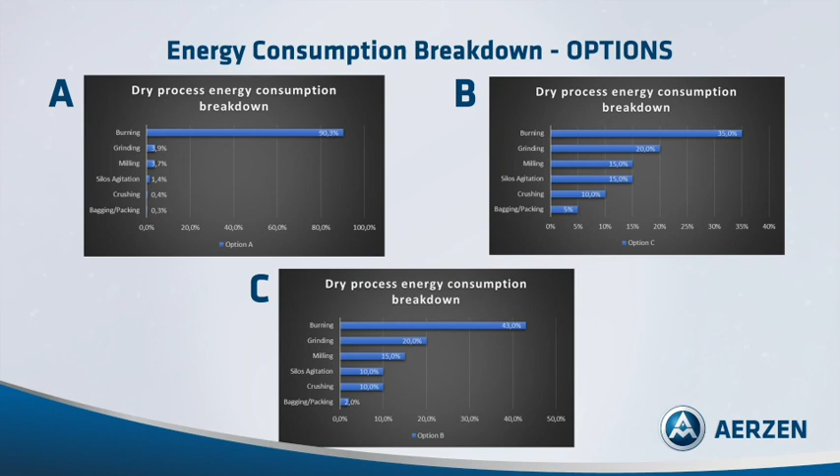Before we get going, let me ask you a question. Can you select the most accurate numbers to describe the energy consumption breakdown in the dry cement manufacturing process? Let's see the options. If you chose option A, you are correct. Burning is the most energy demanding process, basically because it needs to reach temperatures over 1400 degrees Celsius. During the calcination process, most of this energy is thermal energy, in consequence, the highest CO2 emission producer.

AERZEN is fully aware and committed to be part of this challenging target for the cement industry. We know that from those 2.3 billion tons of CO2 generated from the cement industry in 2020, more than 90% came from the calcination process. That is, of course, related to the energy consumption breakdown in the production process that considers both electrical and thermal consumption. This is why we will focus on that process optimization so we can learn the best practices doing what we best do, developing new business models and solutions for our customers.

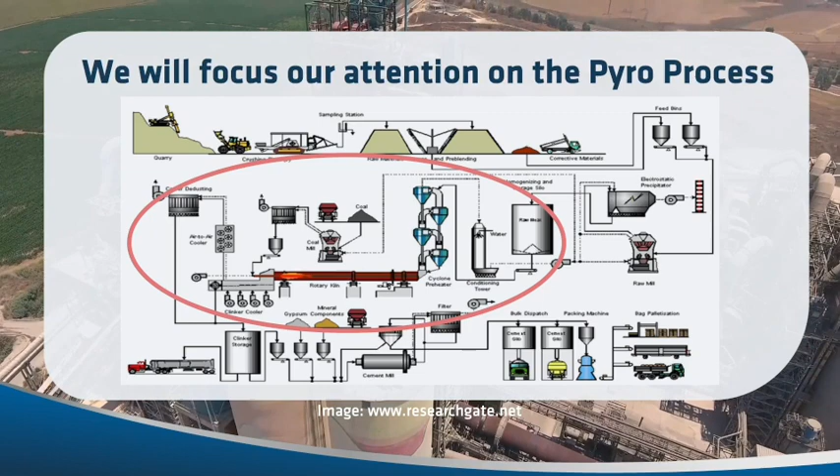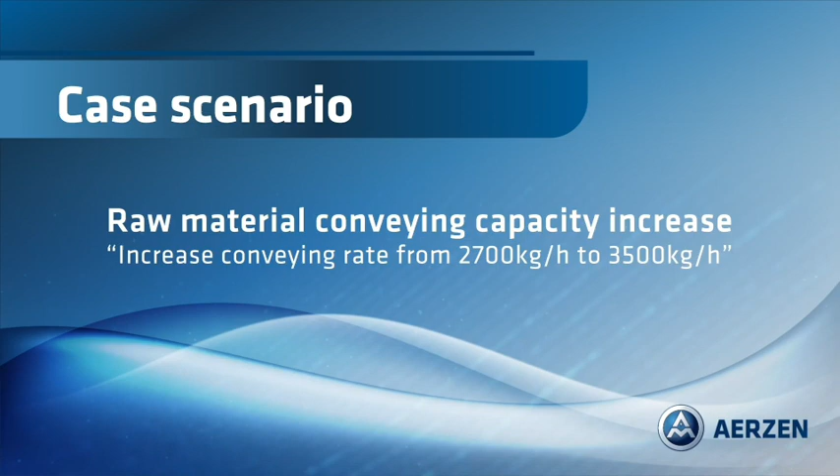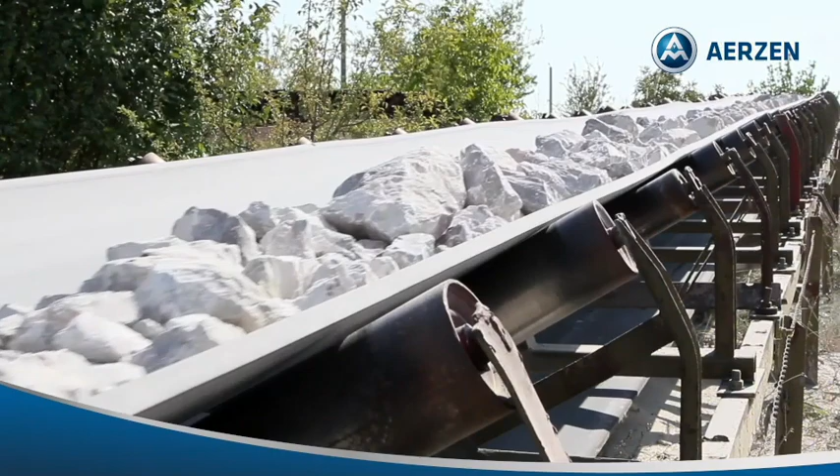Cement industry, as mainly all other industries, requires a raw mix to produce the final product, clinker, which is basically finished cement before it's ground in the final milling process. Raw materials quality and the proper chemical composition of those materials are key factors to guarantee a proper burning process, avoiding lower heat transfer due to bad quality batches.

Raw material is as important as everything else in the process and plays a critical role in the final product quality. Cement is manufactured through a closely controlled chemical combination of calcium, silicon, aluminum, iron, and other ingredients. Can you tell what is the composition range for a good quality mixture of Portland cement? Let's see the options.

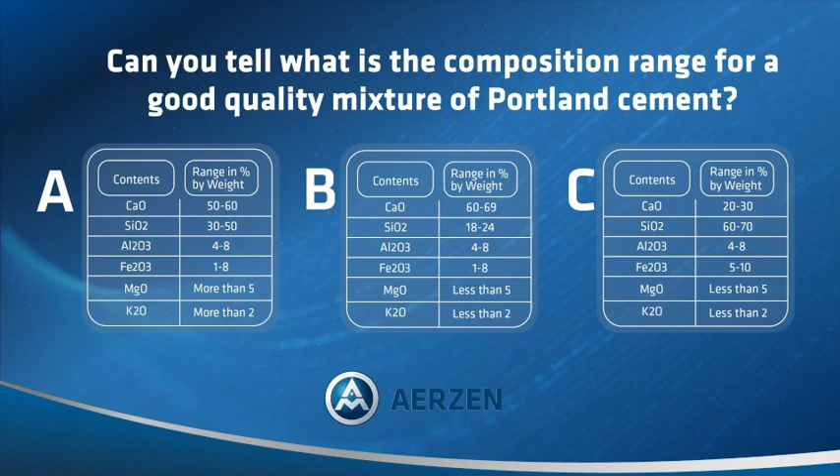If you selected option B, you are correct. Raw mix for cement production needs to have a majority composition of calcium oxide and silica, and a lower proportion of aluminum and iron components. The percentage by weight included in the original mix is tested in the laboratory and needs to fulfill the ASTM C150 standard classification, so it can be called Portland cement.

With any deviation in the composition range, it's a valid construction material, but cannot be called Portland cement, and in consequence cannot be used for high-strength concrete applications such as buildings, bridges, roads, and so on. If we take a closer look at the last two materials shown in the chart, we see that the amount of material is represented as a maximum possible quantity and not as a percentage per weight.

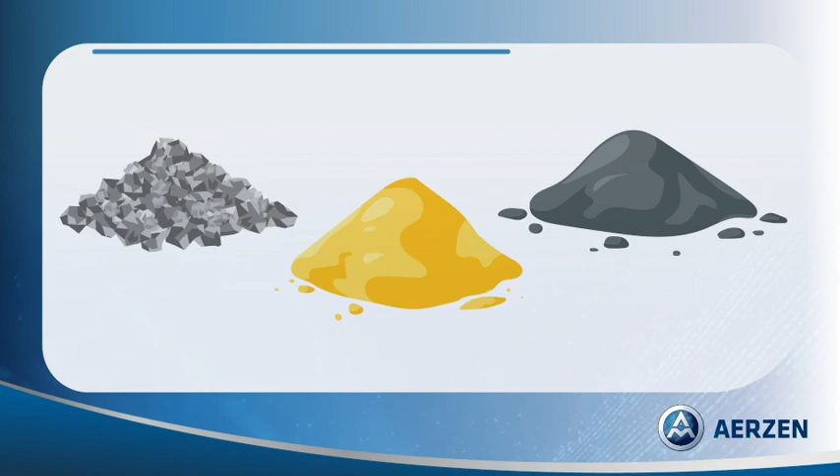The reason for that is basically because the more magnesium and potassium we have in our mix, the harder the oxidation process will be, and we will see incomplete chemical reactions and bad clinker quality. Avoiding these two elements may not be as easy as it seems, as they are attached to the original stone. Corrective materials need to be added and properly mixed to correct this problem from the beginning.

Clearly, they can't, which means they need to add corrective materials to guarantee the chemical composition before the raw mix enters the process. The materials used to correct the mix depend 100% on local availability and will change from plant to plant, even if they are located in the same country. As inland transportation costs are a higher price to pay, cement plants will look closely for the nearest material available.

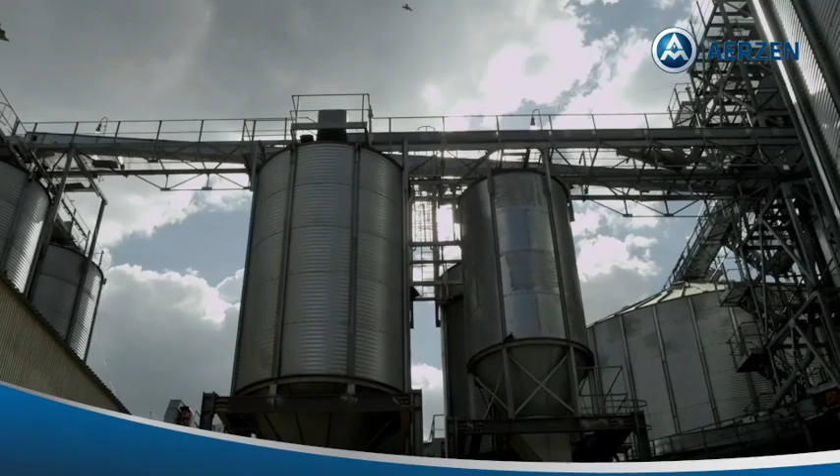In this specific case, they use kaolin and clayey materials to add the expected minerals into the mix and overall reduce the amount of magnesium and potassium per weight in the mix to avoid major problems in the milling and burning process. All these materials need to be properly mixed in the homogenizing silos, so the final composition is as smooth as possible and with the granular size needed to enter the preheater tower.

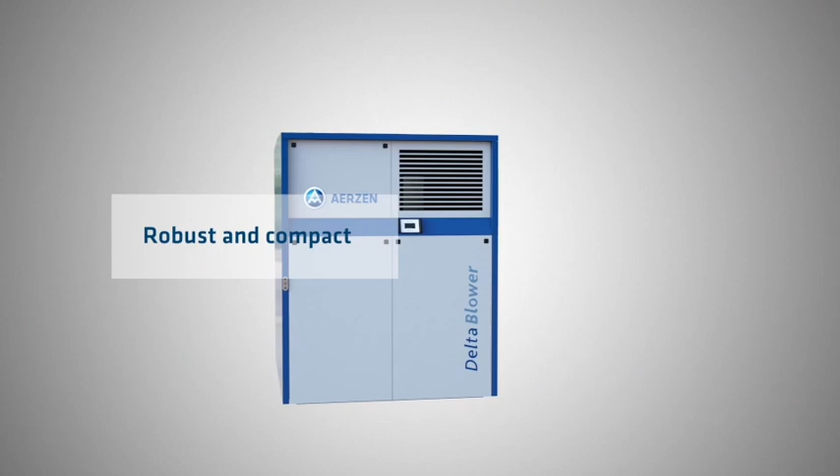Silo homogenizing and raw material pneumatic conveying to the preheater tower are two of the most important applications in a cement plant, where AERZEN equipment homogenizes and conveys millions of tons of raw material around the globe. From the beginning of their operations, this plant has used a set of 10 AERZEN GM25S units to homogenize the mixture in 3 silos with a capacity of 12,000 tons. At the time, they had a sliding vane compressor in operation to pneumatically deliver the raw material into the preheater tower. Operational conditions for those two processes are as follows.

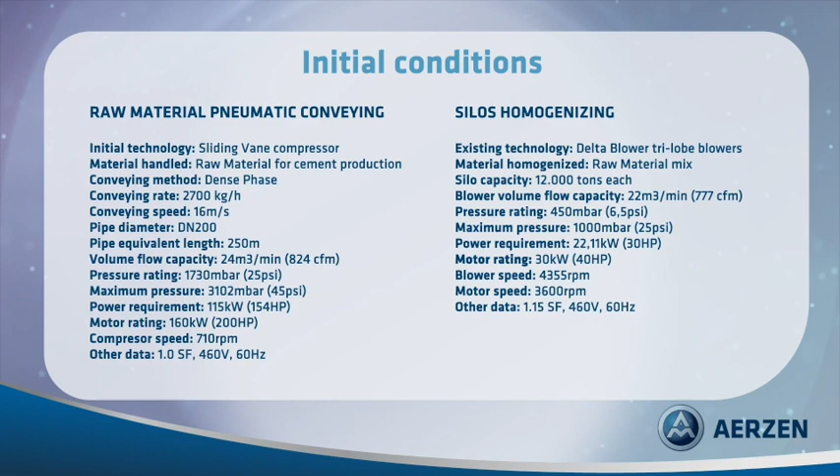Late in 2017, increased production demand required more raw material per hour for the process. As I mentioned, the existing machine was a rotary vane compressor that requires a fair amount of oil in its reservoir, a permanent water supply for cooling, and at least a yearly overhaul to guarantee the internal gap between the vanes and the cylinder to keep the same efficiency level. The machine was also operating near its capacity, and an upgrade wasn't that easy at the time.

The AERZEN team supported the pre-engineering process and helped with basic calculations for the new pneumatic conveying capacity that the system required. The real challenge for this project was to increase the conveying rate from 2,700 kilograms per hour to the maximum capacity, maintaining the same piping system for the homogenized raw material.

As mentioned before, for this type of material and density, the most common conveying method is dense phase, which basically means that the material travels at a slower speed, generally lower than 20 meters per second, on the bottom of the pipe from one point to another. The pipe diameter was an important restriction to the project. However, by increasing the volume flow by 50% and the pressure capacity by 15%, we were able to increase line conveying capacity from 2,700 kilograms per hour to 3,500 kilograms per hour.

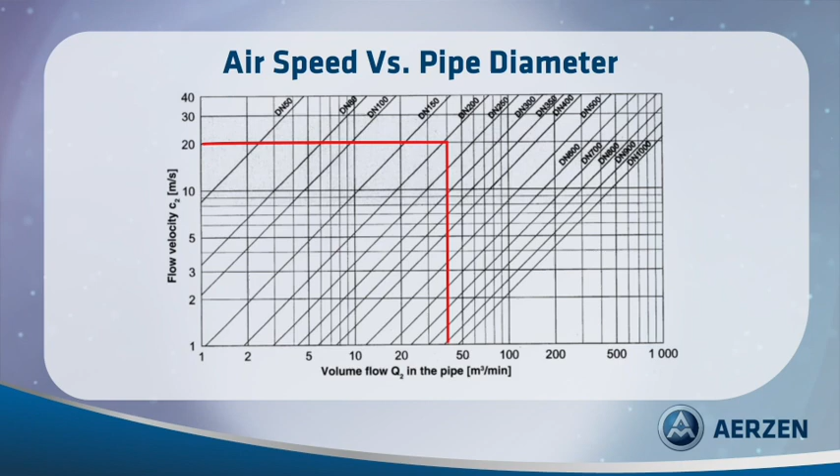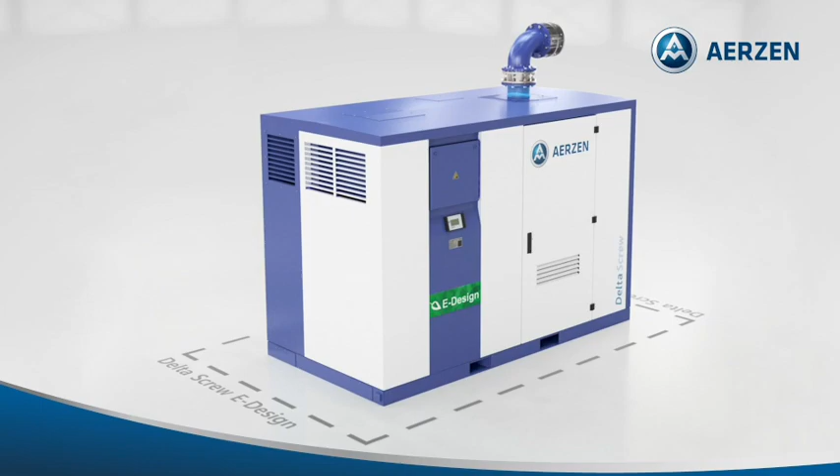Conveying speed also increased, as more material needed to be moved through the pipe with the same diameter. However, we managed to stay at the lower 19 meters per second to avoid pipe clogging. Let's review some of the major takeaways from this case scenario in which we replaced the sliding vane compressor technology with the AERZEN Delta screw compressor.

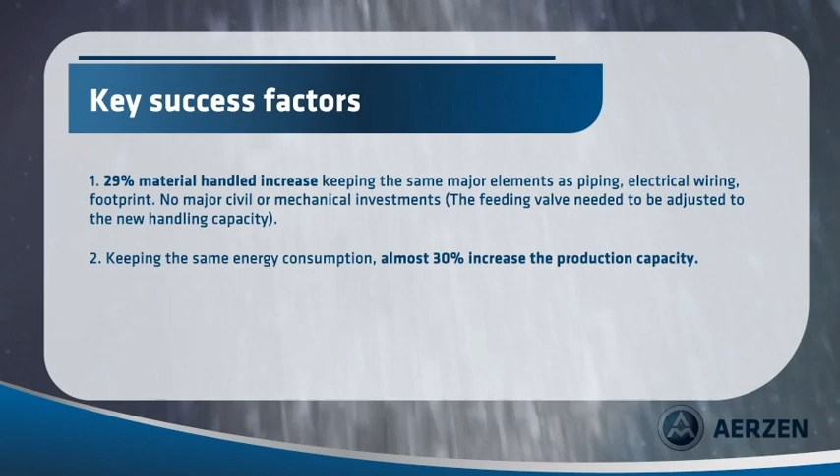First, a 29% increase in material handled, keeping the same major elements such as piping, electrical wiring, and footprint, and no major civil or mechanical investments. Second, keeping the same energy consumption while increasing production capacity by almost 30%. And third, avoiding costly maintenance of oil reservoirs, water supply for cooling, and complete repairs inherent to the sliding vane technology.

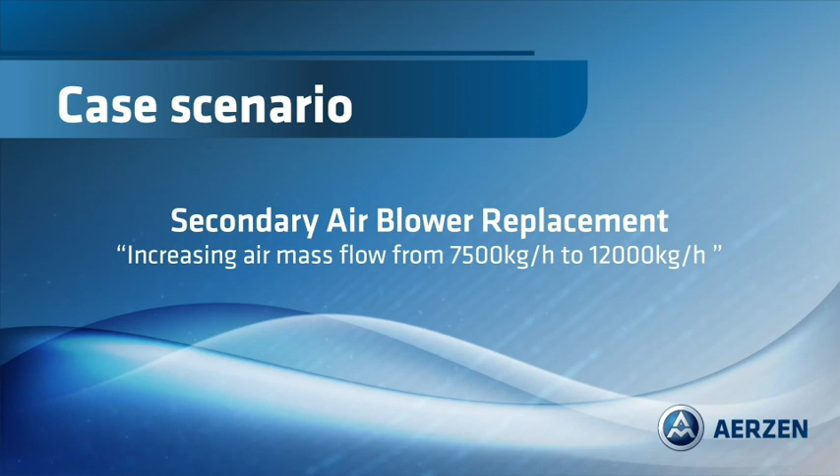Cement manufacturing is a highly energy and emission-intensive process because of the extreme heat required to produce it. Producing a ton of cement requires 4.7 million BTUs of energy and generates nearly a ton of CO2. Different types of fuels can be used to reach that needed temperature to produce clinker, all of them with its cons and pros for the process, as well as for the environment.

Thermal energy is the most important part of the burning process, as the material needs to reach a certain temperature to guarantee the proper chemical reaction of the raw material components. Can you guess how high the temperature needed to produce cement is? If you selected option C, you are correct.

At that temperature, belites and alites are completely formed into the clinker rock, having the appropriate microscopic shape that will guarantee that after the final grinding, where we will see the cement powder, water absorption will be even along the particle, which finally determines the quality and strength of concrete. Have you seen some cracks in the road? One possible cause is a lower cement quality.

Now that we know how important the temperature in the kiln is, let's see the possible materials that can help us reach that high temperature. Do you know what is the most used solid fuel in the cement industry? If you selected option D, you are right. Coal has been the most popular fuel in the cement industry for a long time.

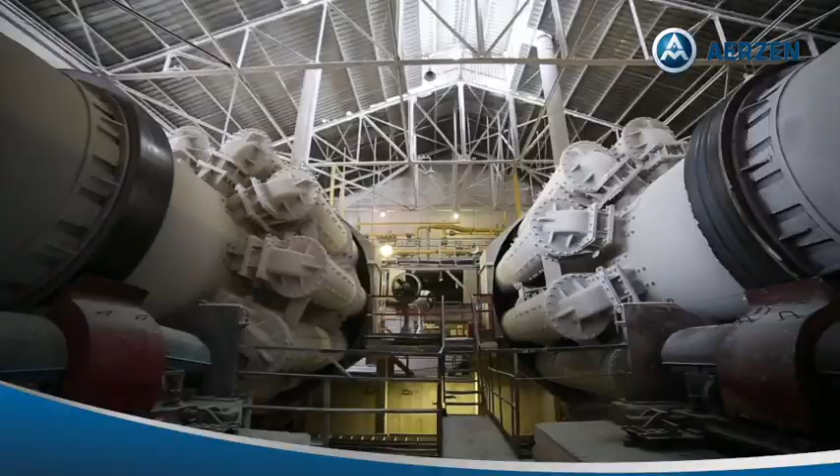A wide range of other fuels such as gas, oil, liquid waste materials, solid waste material, and petroleum coke have all been successfully used as a source of energy for firing cement kilns, either on their own or in various combinations. As we know, clinker is brought to its peak temperature mainly by radiant heat transfer, and a bright and hot flame is essential for this. High carbon fuels such as coal, which produces a luminous flame, are preferred for kiln firing.

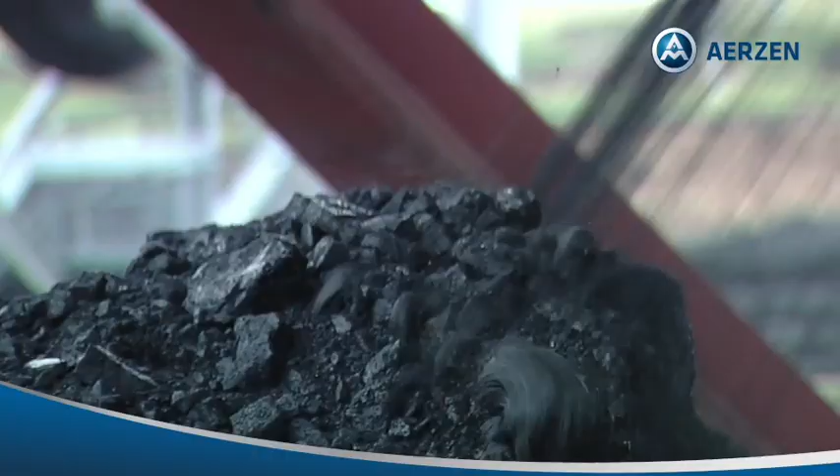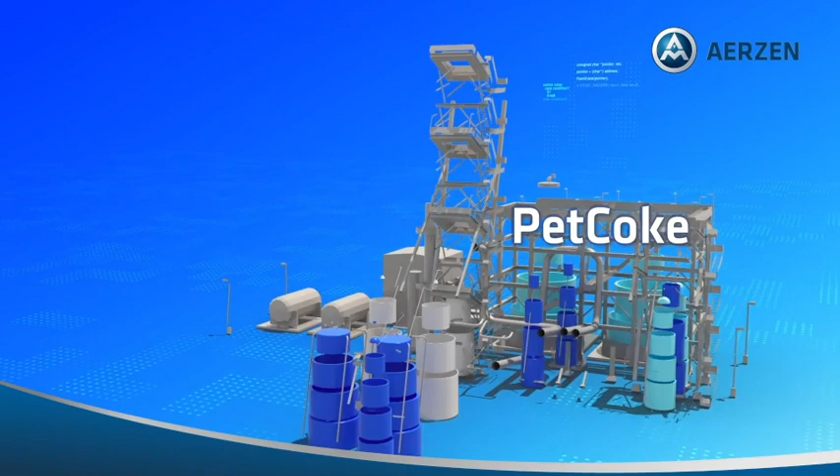Natural gas is in most places cheaper than coal. However, the availability can be compromised, and cement plants cannot afford to limit their accessibility to the fuel. Another material that has been widely used is petroleum coke or petcoke, an oil byproduct with similar heat transfer as coal, but with a considerably higher CO2 emission per ton burned.

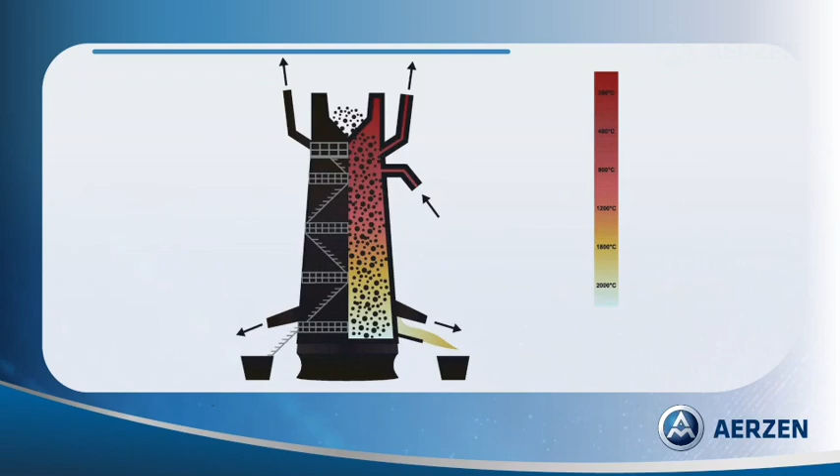In our customer's plant, they mainly use coal as a primary fuel source. However, coal prices have had considerable fluctuations over the past years, and availability of the material has become a challenge in countries where power plants fired by coal are a priority. In addition to this, the plant was going through an important expansion project to increase capacity from 3.2 million tons a year to 5.2 million tons.

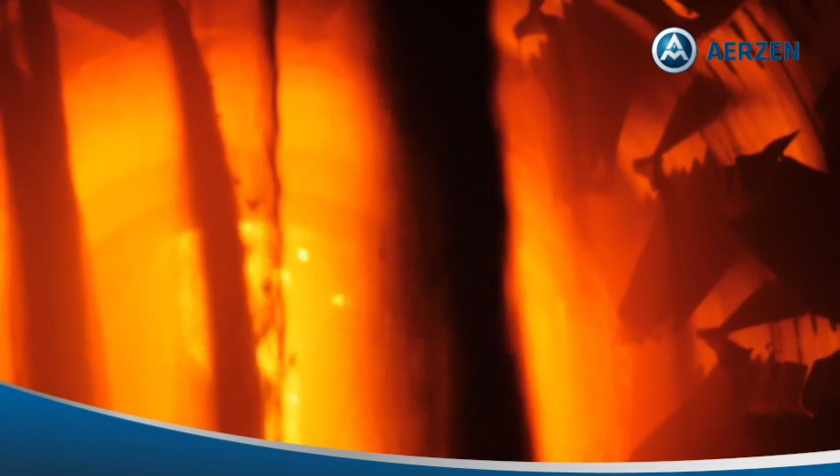Taking this into consideration, the cement plant decided to increase burning capacity and make it suitable for alternative fuels and petroleum-based fuels such as petcoke. The existing burner, suitable only for coal and heavy oil for the startup, was replaced with a burner suitable for gas, liquid and solid fuels of different characteristics, to include alternative fuels. The process required an important investment in engineering and optimization of the existing equipment. Let's take a look at how AERZEN supported this project. Here is the technical data.

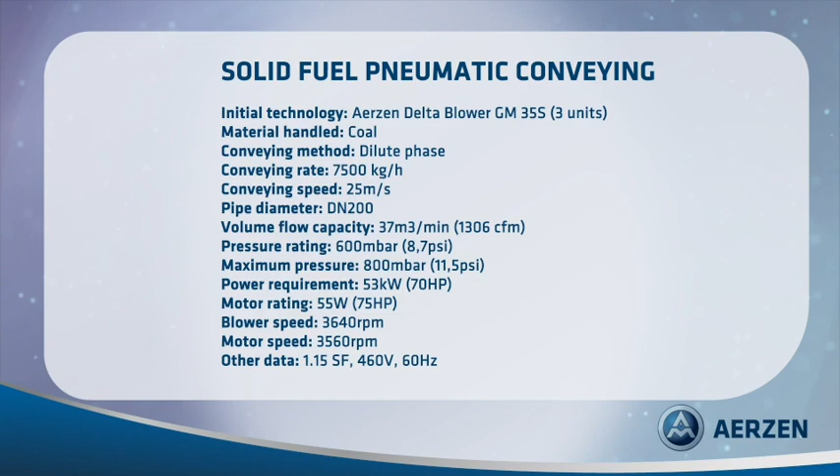At the same time the plant was replacing the burner, new operational conditions were required for the fuel conveying system that consider both the plant expansion project and the alternative fuel condition. As in most expansion projects within cement plants, piping was required to keep the same length and nominal diameter, as complete replacement would require a more complex intervention with a longer downtime.

The biggest challenge in this project was to avoid exceeding the 30 meters per second limit for the solid fuel conveying. We needed to take into account the pipe diameter as the biggest physical limitation. In this case, total equivalent pipe length was short, no longer than 20 meters, which was good for our calculations. We didn't want to exceed 30 meters per second in the conveying speed, as for this application, maintaining a laminar flow is critical to guarantee a stable and long enough flame out of the burner, as it also plays a big role during the combustion and heat transfer process.

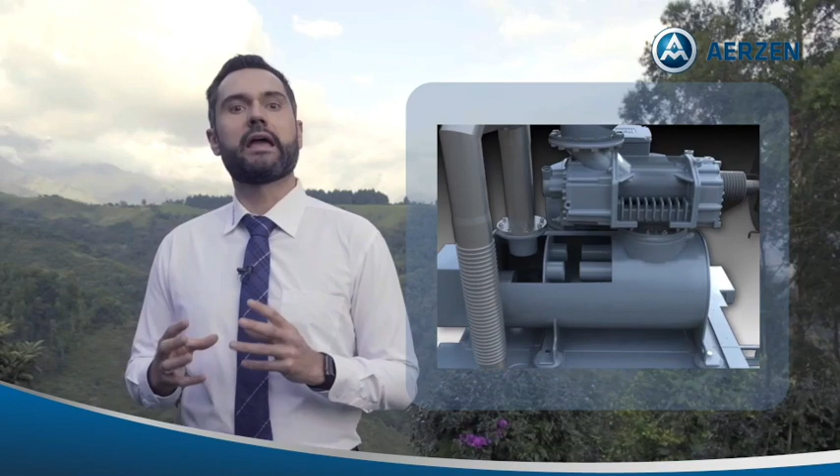Hybrid technology was a perfect fit for this application, as its internal configuration and higher rotation speed reduce air pulsations, making the air delivered smooth and laminar. However, exceeding the air delivery limit into the pipe will cause a rupture of the Reynolds number and start making the air turbulent. We didn't want that, as it may result in anticipated combustion and a shorter flame that can even cause the burner tip to catch fire.

The final decision was to use two D98S Delta Hybrid units with over 60% more volume flow capacity and 30% more pressure capacity. All calculations were carefully made to avoid exceeding 30 meters per second of air velocity in the pipe. Let's review the key takeaways from this case, where we replaced a Delta blower with a Delta Hybrid unit.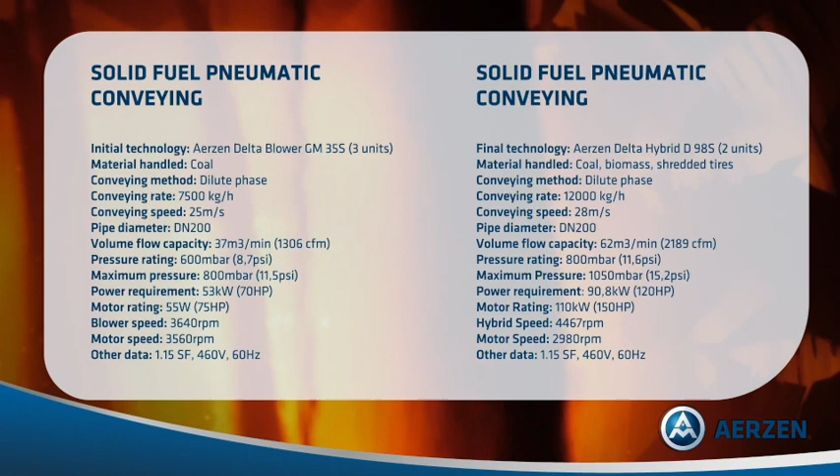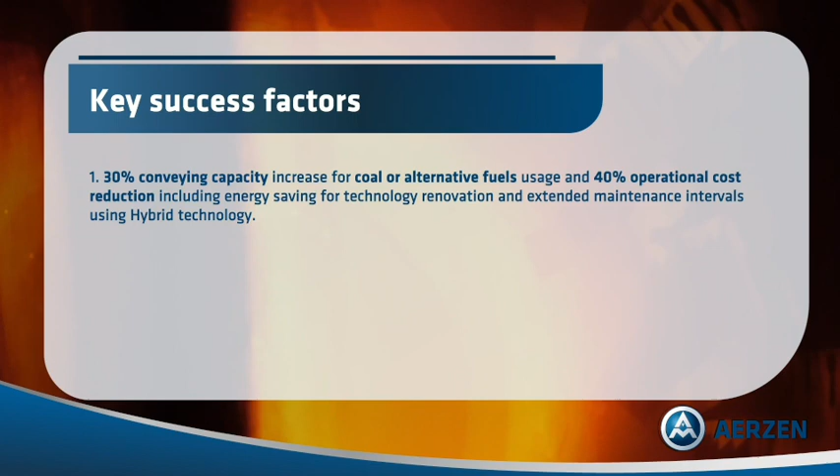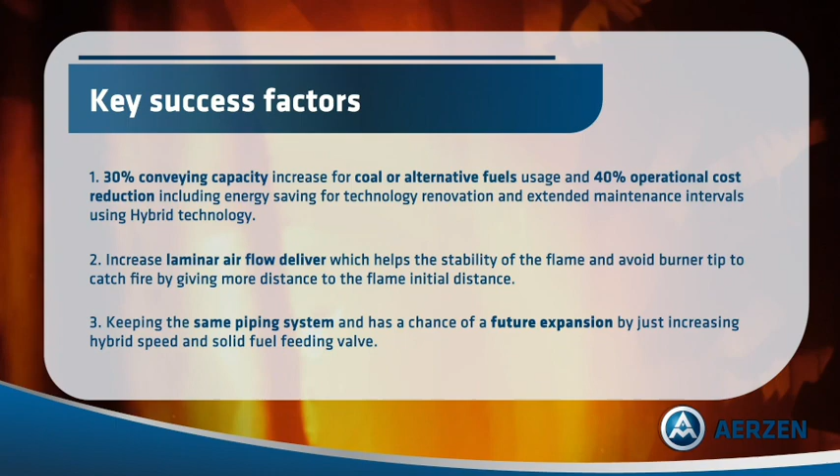First, 30% conveying capacity increase for coal or alternative fuel usage, and 40% operational cost reduction, including energy savings from technology renovation and extended maintenance intervals using the hybrid technology. Second, increased laminar airflow delivery, which helps the stability of the flame and keeps the burner tip from catching fire by giving more distance to the flame's initial point. And third, keeping the existing piping system, with a chance of future expansion by just increasing the hybrid speed and the solid fuel feeding valve.

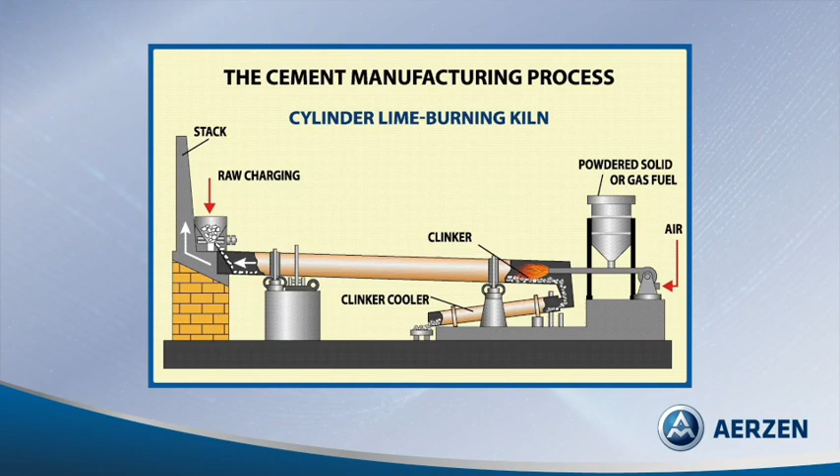Successful operation of a rotary kiln in cement plants requires an adequate source of heat that will first raise the kiln to the operating temperature of over 1400 degrees Celsius and will then maintain that temperature by compensating for the various heat losses occurring in the kiln system. The heat is obtained by the combustion of fuel, mainly coal, combined with oxygen in the air.

To obtain a proper combustion, two requirements must be fulfilled. First, sufficient oxygen present to mix with the fuel, and second, a constant and stable fuel supply into the system. Primary air, jet air, or combustion air, depending on the region where you are, all terms mean the same. Air supply for the primary burner in order to guarantee a proper combustion with a beautiful long and wide flame across the kiln that guarantees the most heat transfer into the kiln.

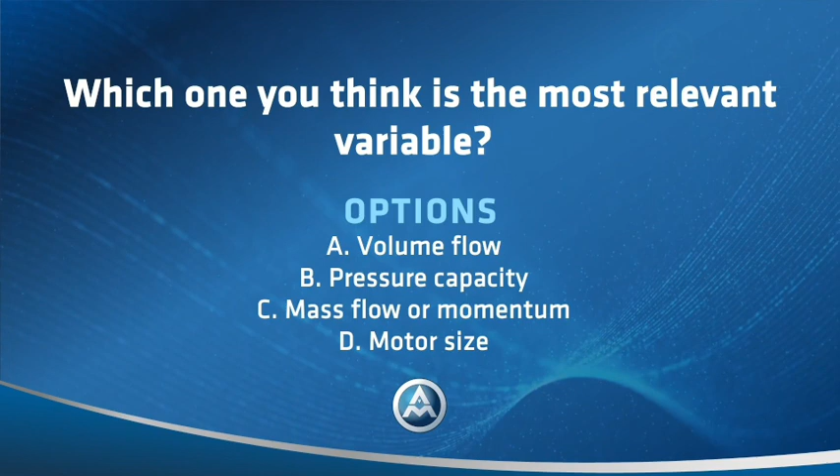Many variables are involved in selecting the proper equipment to deliver this air into the system, but there is one that definitely matters the most for the production process. Which one do you think is the most relevant variable? If you selected option C, you are correct. Momentum or mass flow is the most critical variable as it defines the oxygen mass flow that will be delivered into the system to guarantee the proper combustion.

Ambient variables such as altitude over sea level or ambient temperature can dramatically affect the momentum and in consequence the heat transfer into the kiln. In addition to this, combustion air is the only resource for cement plant operators to control the kiln temperature and adjust it when a bad quality batch of raw materials enters the kiln or a new fuel usage is required.

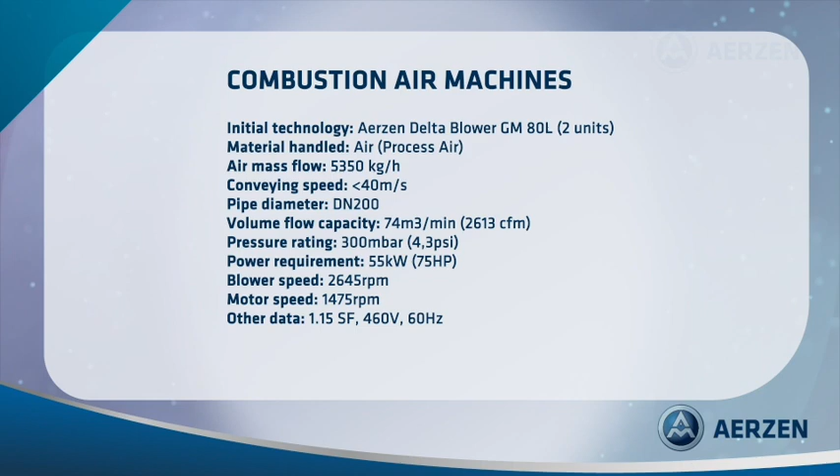The challenge in this case was related to increasing the mass flow through the same pipe system from 5,350 kilograms per hour to 6,800 kilograms per hour of air. In this case, the application is also known as process air, basically because there's no pneumatic conveying of any material through the pipes. Only air is conveyed to feed the kiln.

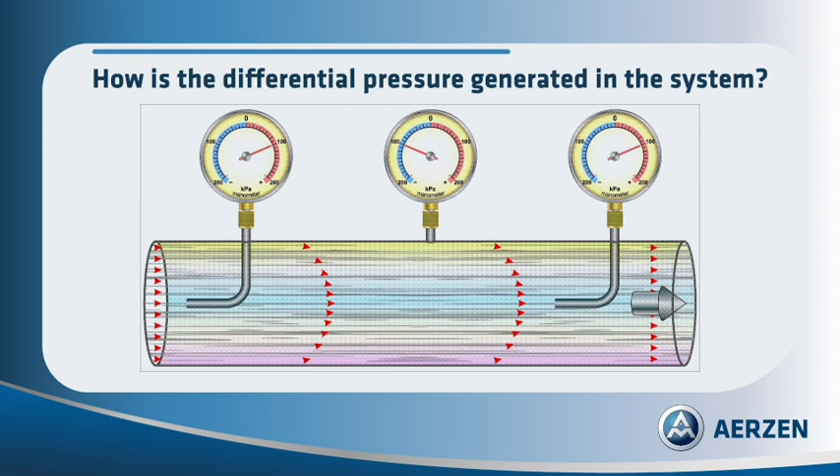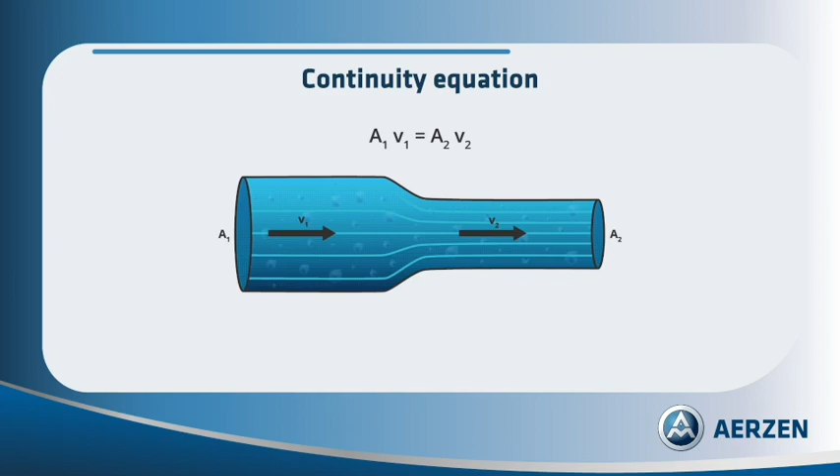But if there's no material handled through the pipe, how is the differential pressure generated in the system? The answer goes back to the continuity equation, where the pipe diameter reduction at the end of the pipeline increases the speed and air turbulence to generate additional momentum and helps the combustion process. In this case, the most critical limit was given by the pipe diameter. We did want to increase mass flow and turbulence into the system, but having too much air through that pipe diameter could also choke the air output due to extreme turbulence.

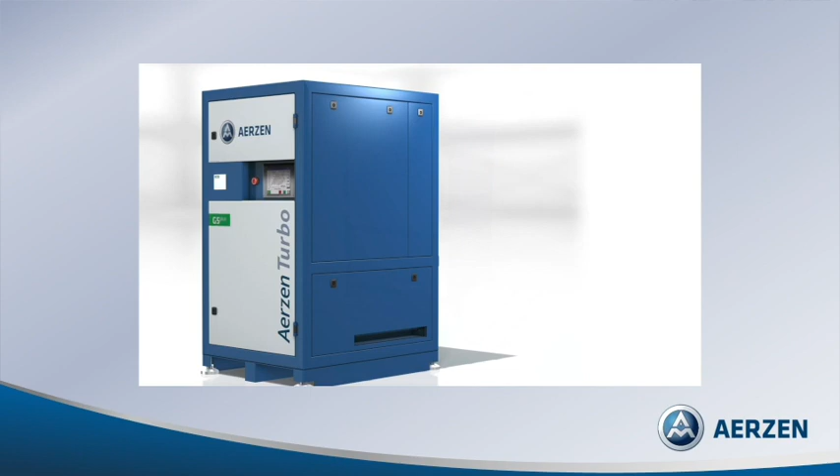With the on-site conditions, the best possible option was to install a high-speed turbo blower, which gives a constant mass flow through a high-speed impeller, giving the process reliability and the additional mass flow needed according to the pipe diameter. In addition to this benefit, AERZEN Turbo includes an on-board variable speed device that helps control the system and the airflow in case of alternative fuel or a raw mix material change entering the kiln. This application helps the operator to control the process, the same way you control oxygen supply when using a torch.

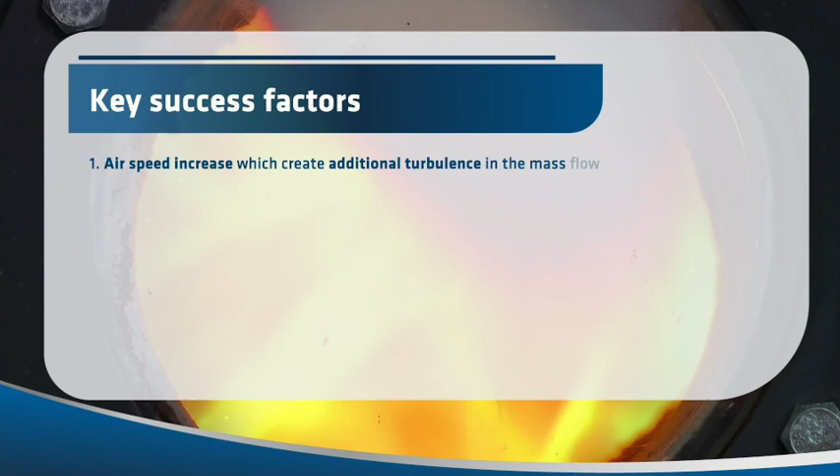Let's review the key takeaways from this case scenario where we replaced a Delta blower with the high-speed turbo technology. First, air speed increased with a variable speed device, which creates additional turbulence in the mass flow delivered, making the flame size bigger and robust. Second, footprint reduced compared to the previous technology, and maintenance costs reduced to almost zero as turbo technology is maintenance-free. Third, electrical energy consumption dropped by 30% compared to previous technology, and additional control of the process to handle different raw material batches and new alternative fuels.